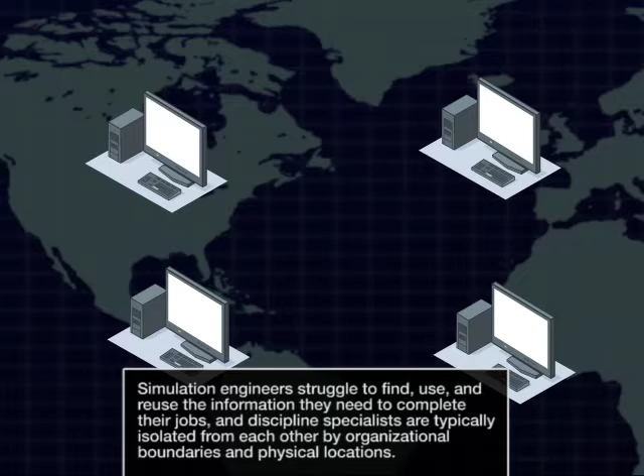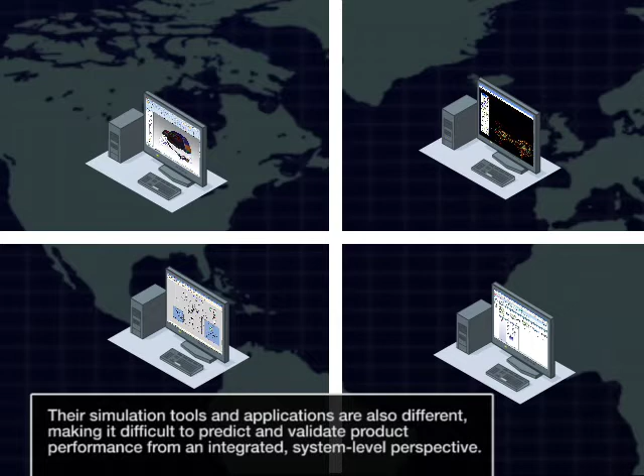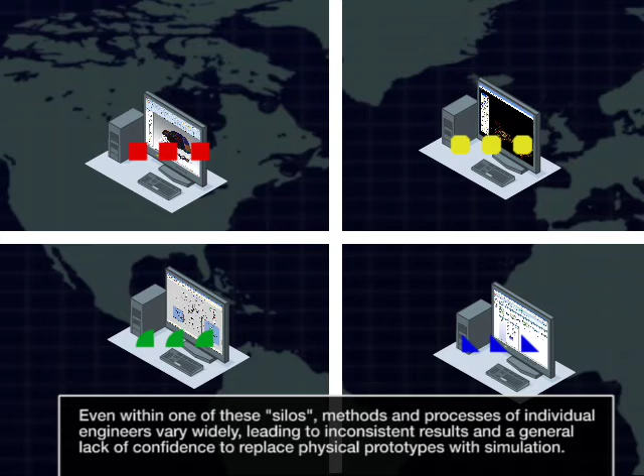Simulation engineers struggle to find, use, and reuse the information they need to complete their jobs, and discipline specialists are typically isolated from each other by organizational boundaries and physical locations. Their simulation tools and applications are also different, making it difficult to predict and validate product performance from an integrated system-level perspective. Even within one of these silos, methods and processes of individual engineers vary widely, leading to inconsistent results and a general lack of confidence to replace physical prototypes with simulation.

Compounding all of these challenges is the impact of globalization, as many companies today have engineering centers around the world that struggle to work together productively as distributed teams. MSC SimManager delivers proven out-of-the-box simulation content management to help global, multidisciplinary project teams share models, methods, results, and other simulation content so that engineers can quickly find and use the information they need to simulate more productively, more collaboratively, and more efficiently than ever before.

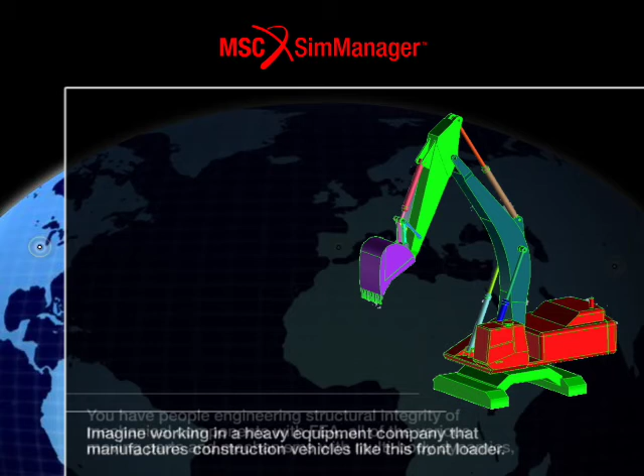Imagine working in a heavy equipment company that manufactures construction vehicles like this front loader. You have people engineering structural integrity of mechanical components with FEA, all of the various moving parts and mechanisms with multi-body dynamics, and other engineers who need to design control systems that establish how the operator's levers and pedals activate motion of the shovel. In most such companies today, these engineers simulate and design in isolation from one another, and synchronize their work and design modifications only occasionally.

Often they're located in different parts of the world, so time zones, language differences, and physical distance compound this problem. Ultimately, this slows down the product development process and makes it almost impossible to arrive at the final, working design without many physical prototyping and testing iterations. Using SimManager, however, your engineers share up-to-date models and results and evaluate the front loader as an integrated system, despite the fact that they work in different buildings and even different countries.

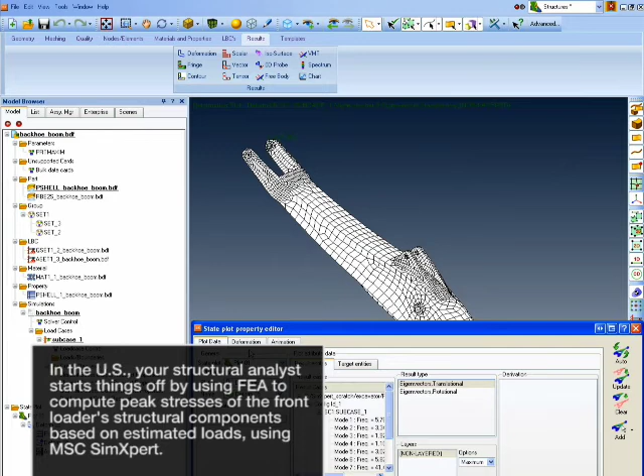In the US, your structural analyst starts things off by using FEA to compute peak stresses of the front loader's structural components based on estimated loads using MSC SimXpert. She also computes the natural frequencies and mode shapes that define the flexibility of each component, which will be needed by other engineers later while designing the mechanism and computing the true forces and loads on every component. Using SimXpert's out-of-the-box integration with SimManager, she publishes her models, results, and even her best practice templates for each analysis into the SimManager Vault.

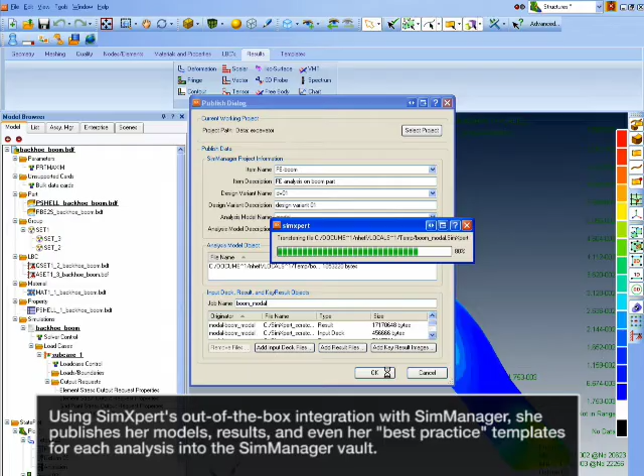MSC's engineering products and SimEnterprise applications provide integrated access to SimManager and its powerful simulation content management capabilities within the familiar user interfaces of these applications. MSC applications providing this integration include SimDesigner, SimXpert, Patran, Adams, and Easy5.

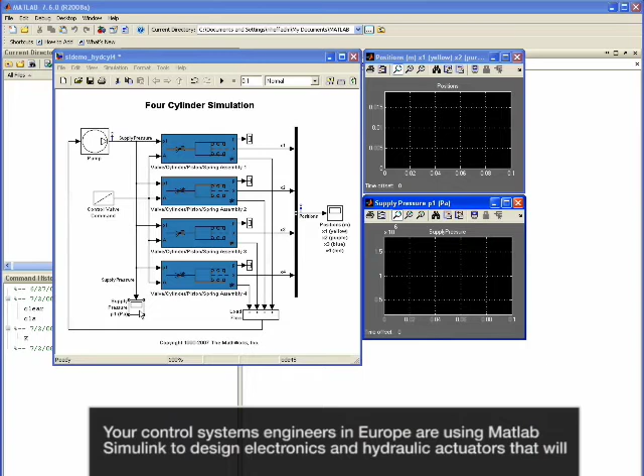Your control systems engineers in Europe are using MATLAB Simulink to design electronics and hydraulic actuators that will convert the pedal and lever action of the front loader's operator into motion and forces that translate and rotate the shovel in order to dig. SimManager's web client provides a simple way for users of any non-MSC application to publish, retrieve, search, and find all relevant content from Internet Explorer or Mozilla Firefox. Examples of other applications that can be used with SimManager include ANSYS, Altair HyperWorks, Beta CAE's ANSA, MATLAB, Abaqus, Excel, FEMAP, and many more.

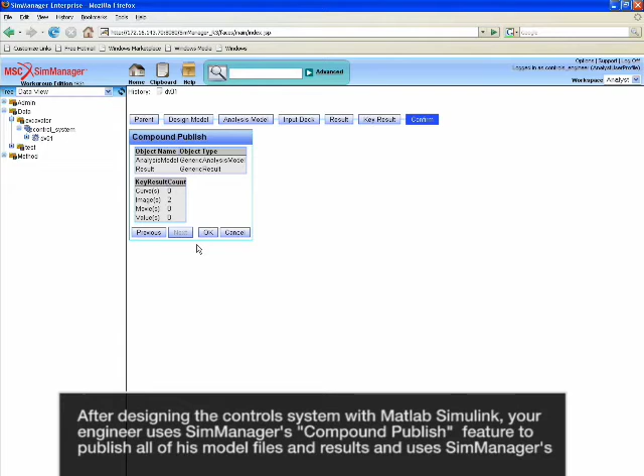After designing the control system with MATLAB Simulink, your engineer uses SimManager's Compound Publish feature to publish all of his model files and results and uses SimManager's built-in email notification capability to inform his colleagues in China that his models are ready for integration into the front loader system model.

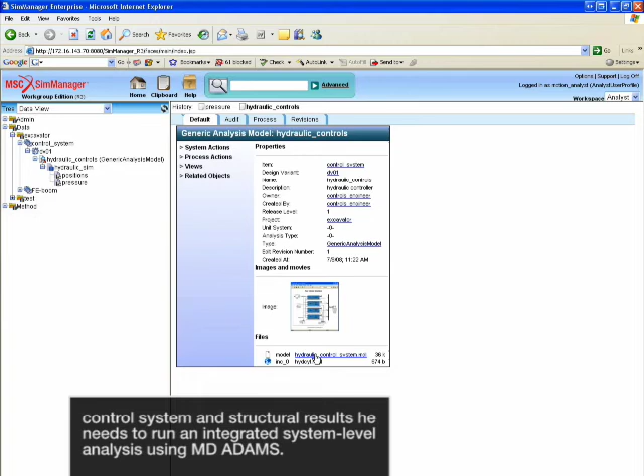When your system motion analyst arrives at work in Beijing the next day, he finds an email providing a direct link to the latest, up-to-date control system and structural results he needs to run an integrated system-level analysis using MD Adams. From within the MD Adams user interface, he connects to SimManager and retrieves an assembly template that creates the front loader model from CAD components using the approved best practices of your company.

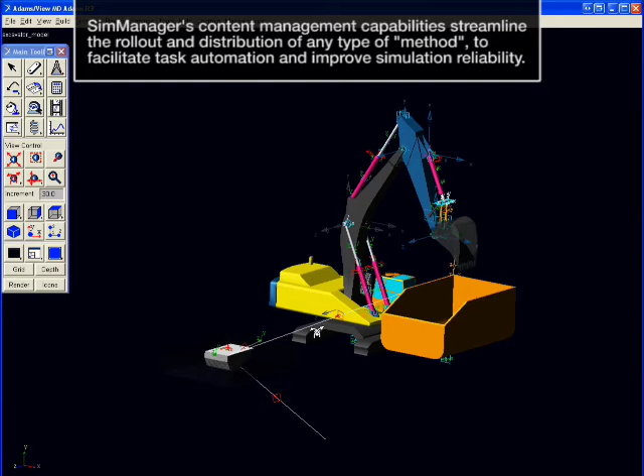SimManager's content management capabilities streamline the rollout and distribution of any type of method to facilitate task automation and improve simulation reliability. SimManager supports methods of any type, including SimExpert templates, session files from Patran, HyperMesh, and others, macros, scripts and executable code, and instruction documents.

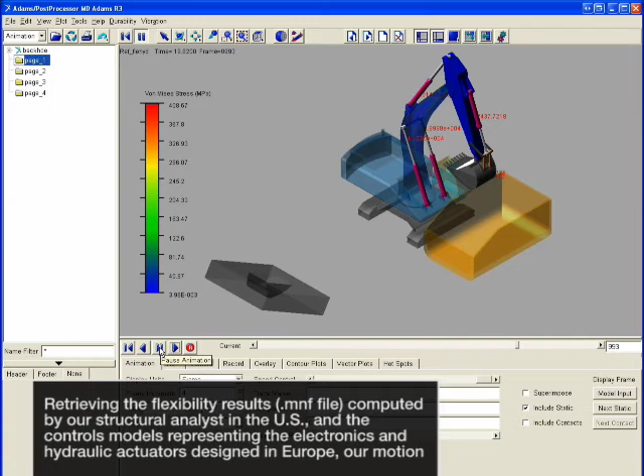Retrieving the flexibility results computed by our structural analysts in the US and the controls models representing the electronics and hydraulic actuators designed in Europe, our motion analysts in China can use the integrated multidiscipline solution capabilities of MD Adams to simulate the front loader's real-world performance accurately and reliably. Satisfied that the front loader design meets performance requirements, the system analyst publishes results and a summary report and notifies a front loader project manager that the simulation project is complete.

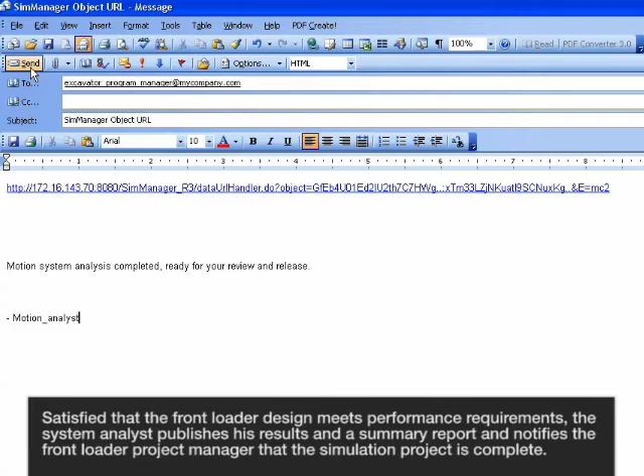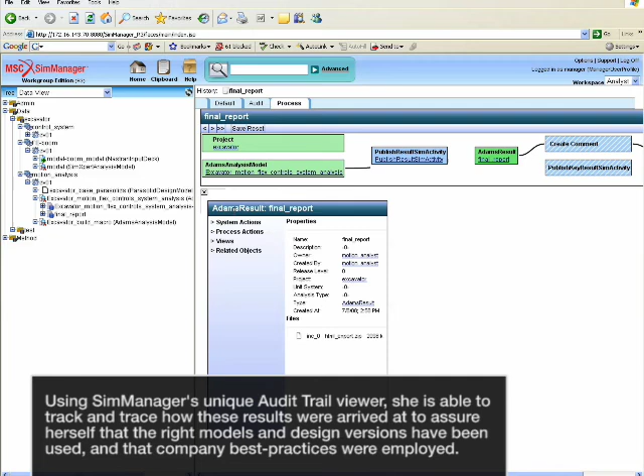Your project manager receives notification that the design has been validated against requirements using simulation. Even though she's traveling on business in South America, she can access the summary report through her web browser and review the results. Using SimManager's unique audit trail viewer, she is able to track and trace how these results were arrived at to assure herself that the right models and design versions have been used and that company best practices were employed. Once she has reviewed the simulation project, she promotes the complete set of simulation content to approved status to make it accessible to all project personnel who need access.

Companies in manufacturing industries across the world are recognizing SimManager as the only proven and scalable solution available to manage their simulation content with the existing tools and methods. Leaders in automotive, aerospace, shipbuilding, electronics, consumer goods, and other industries are reducing the time spent looking for information, collaborating more effectively, and improving the reliability of their simulation results with SimManager for real business value.